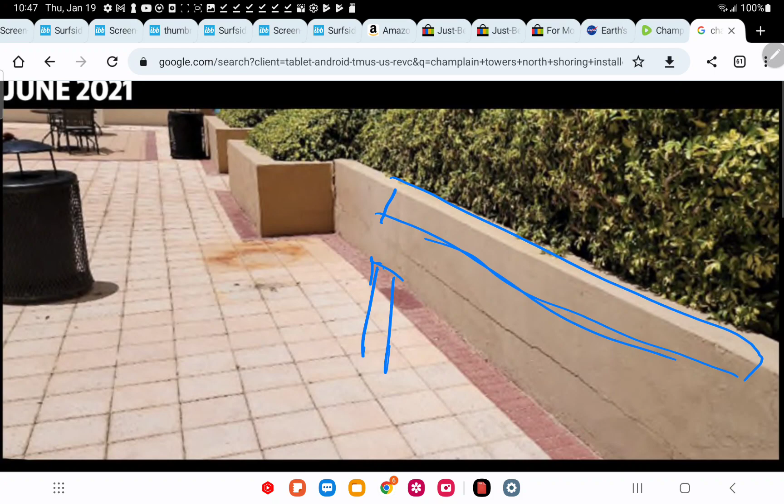Let's move on. So this shows the deck deflection. You have that in your mind. The deck's deflecting. There's a column thereabouts here. It's below the deck, thereabouts right there. So when this deck goes down, you actually see this section on the ground. This bond beam section, this top part on the section laying here. I think it has a little thin layer there, and then it goes something like that. This might be up here. I'm just trying to use my memory.

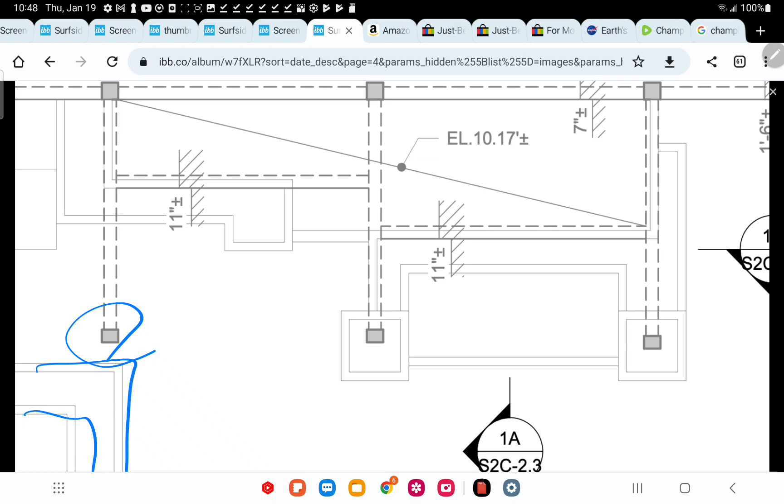Here we have the bond beam that's out of bounds, out of the planter box. It's the planter box there. For your notes. Here's that beam I talk about right here, the bond beam. It goes back there like that, and over here like that. There's the column I mentioned that it was standing over.

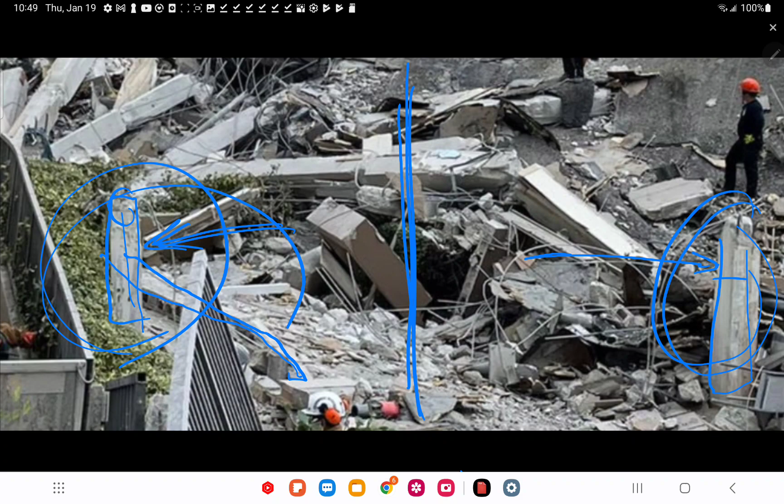While we're here, there's a plant. Okay, that didn't work out like I wanted. Okay, let's go with that. It's actually what I was looking for. So there's that. And so I was wrong. Remember I put it at the bottom? There it was at the top. So like a broken clock, I am right twice a day. All right, so this wasn't one of them. I was right when I said I might be wrong. It might be on the top. Okay, so there's the end of the planter box, and there's the planter box part.

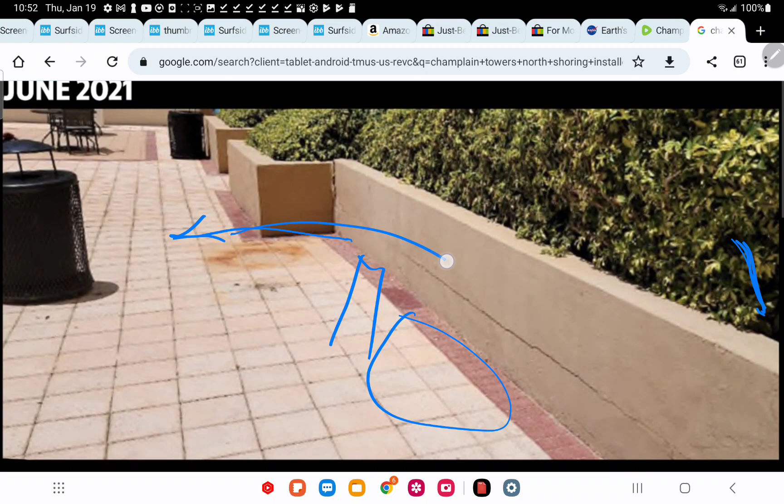So I believe that column's under here. The deck is creeping down. It's doing this. It has that fracture over there by that one column, and all of this is creeping down also. So this is, let's do some exaggeration like that. Okay, and that's that rotation outwards also, because this box is no longer square. To rotate down, considering nothing pushed it laterally.

Like I said, a car backing into the railing, pushing the soil, and then pushing that over. We would see also this would break here, and what are the odds it would push at the bottom of the box and slide it over only at the top? It's possible. You know, as I state, anything is possible.

You can tell me I can shrink down to 1 inch, and I'm not talking about, you know, my size. You can tell me I can shrink my entire body down to 1 inch. You could say I can't do it. I'm like, well, it's possible. You just have to give me the technology to do it. I'll tell you what I need, and you do it, and it's possible. Oh, if you don't have the technology, well, that's not my fault. I just said anything's possible. So if you keep your mind open, anything is possible.

So you have to, you know, think outside the box about what could also do this. Truck, the soil, the pushing, trying to debunk yourself is what I'm driving at. Try to do it.

Okay, so now this is where I believe we're getting at that lifting of the box here, that the columns underneath, as the deck flat goes left and right, this just gives us a larger gap here and a tighter gap here. Let's do an exaggeration. So let's do, well, let me try this. Do an exaggeration. And then, all right, so that didn't work. It's got to be more solid here. Definitely confusing you, right? Let's do this again. So let's see if I can just use this.

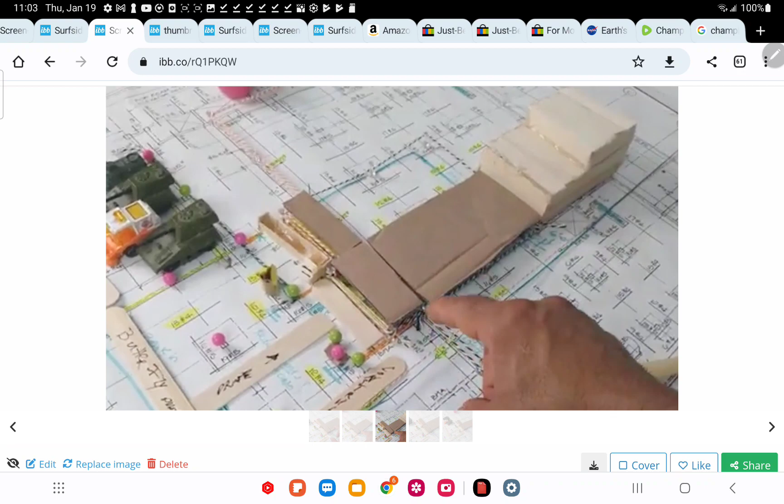And when the building went down, it drove this down flat, including the BMAs. So when that other part of the structure came down...

I base that on this rebar - if you remember, I said about a year ago that this rebar has already shown it has no ability to tug on anything, because it's not engaged enough. There's some engagement there, but not enough. Probably, before you turn up, maybe 7 inches of engagement. Remember, this is those drop slab details, and right about here is the sample that's bad.

And then a deck turns up here because it put that lower planter box there, so it's bad way out to here. So that fracture I described - if they did another core sample besides here, they'd have gone into the planter box, that lower planter box, and did another core sample - I would predict they'd see about the same fracture, no engagement with the rebar.

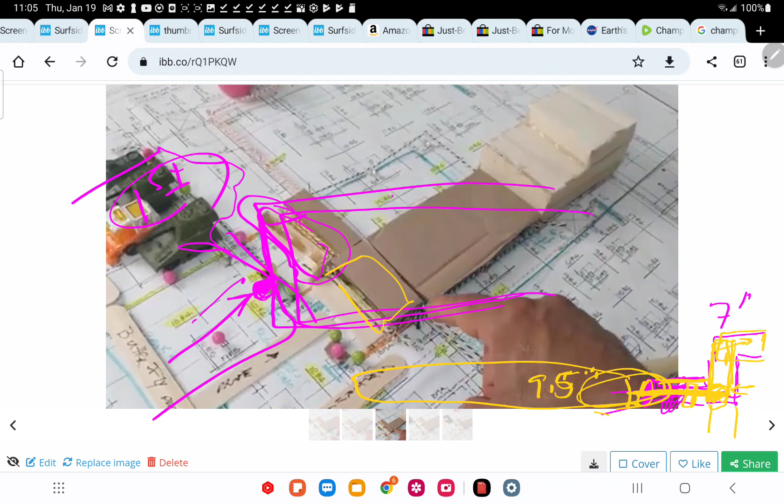So I think I'll end it with this video, this part of the video here.

Remember, our planter box - this is the column that is lifting up in two directions. So this would be, let me say, this is down and this side is up. Remember the drive, that this is not subsided. So I'm going to do up here. I'm going to put the fracture - okay, where am I? Fracture line here, I'm going to put a core sample that's crappy here.

Going back to the diagonal over here somewhere - let's see, planter box? No. So this is the planter box, I believe. So I'm doing a crappy core sample here. Let's see if I can change colors for you. Crappy, planter box, column - that's column in planter box. Fracture. There's a planter box here. All this walkway stays. Core sample with the fracture.

Remember the fracture, as I theorized, like that. So you're getting this failing first. That's why you're able to get that core sample to look that way. I say this is down, D-O-W-N. Let's do that - this is up. So this is up, this would be down over here. A rotation of our box.

So we're going to extend it out a bit. Let's change colors - well, that looks like the wrong color. I got a blue up there already. Let's go with the red. I got some red too. So let's do this - this box is indicating it's rotating down. Oh, look where that puts us - right in our butterfly zone. This is the part that's rotating down.

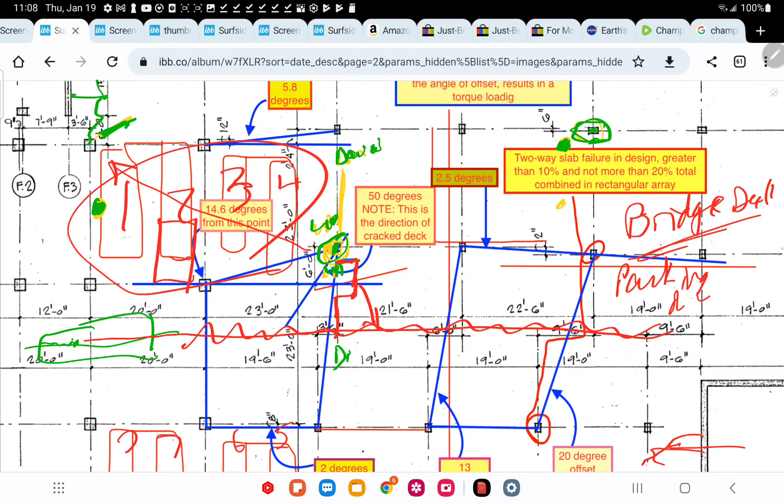The overlay - I did a video on that. That's so critical to extending the life of this deck, even though it wasn't bonded fully. I show that over here - this deck, the bond is capable of a cantilever effect, and as it is over top of each one of these columns over here, out in this part of the deck, it creates its own critical shear zone and then a little bit of tributary zone.

It creates its own - it showed itself here how it can cantilever off the side of a pool deck. That was pretty amazing because it's not on top of this - actually it goes over top, but it's not resting on there. And yet this deck is able to keep itself in an overhang position without fracturing. I talk about how if you then put it over top of all of these columns here - okay, so over top, these are over top.

These are not over top. These are, because there's a column there, they just butted up to. So these are just butted. Okay, so this is my structure now. So this is just butted up to.

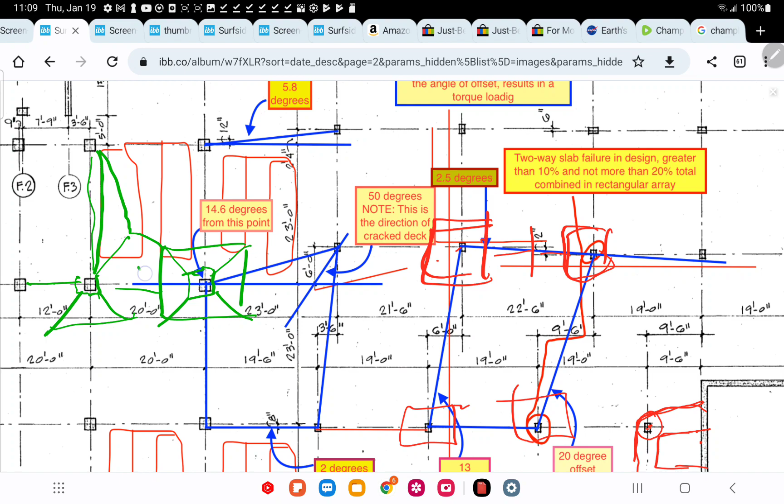So this becomes a dead load. So this becomes, well, this side, because that's an elevated side over here. It's like 1 foot something high. This is dead load. All right, this is all dead load decking here. The extra overlay, all of it. Planter box butts up to the planter box.

All dead load. Okay, over here, it all of a sudden goes over top. Nope, there's a column that goes straight up to the top floor. So again, all dead load. There's a planter box here, so the deck goes up to it. The concrete's a dead load.

All dead load. Back to here now, it becomes over the top, but it has some critical shear zone ability and a cantilever effect out to it to a degree. So this one is butted up. There's a planter box, so it's butted up to.

This is up to. Out here is different behaviors. Here, here, here, here. And there's a construction joint somewhere about here. So if you look at this, you see that this is actually stronger here in all these areas. Again, we're back down to the butterfly in the middle.

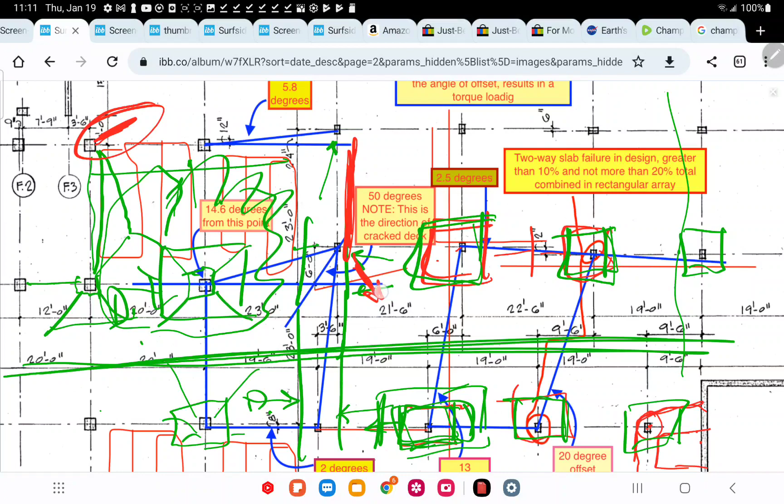But critically so is this fracture right here. Critically so is the identifying of that fracture along that planter box there, the moment of the failure. And it appears to me as the deflection goes away from this planter box, that direction.

Now, if the planter box was 90 degrees, let's say, let me show you the planter box at 90 degrees. So here's the deck. We're going to look at it in this profile like this. And here's the planter box, right? This is 90 degrees. We're looking at the deck here. We're out here in this pool area, pool deck here, right? This is where we're looking. And that's 90 degrees.

Can you get this to rotate the back side of the box to rotate towards this direction here? Can you get that and still get what you observe? Well, why would it fracture the front? I don't have that. We have to get that fracture going in that long direction. I have that column, again, being rigid, transferring up into the... now I'm double dipping on the imagery. I have the column

double dipping now. Let's see. So here it is, solid block above it. And then here's the fracture now. I'm double dipping on the design as I'm doing that.

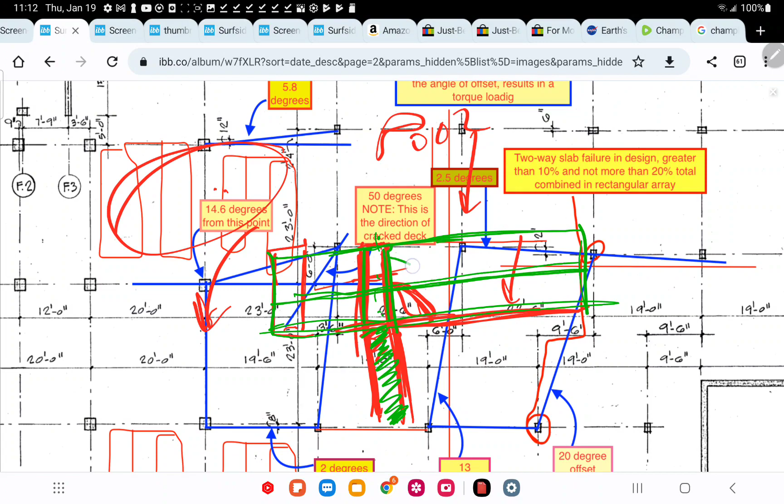And our rotations are down these two directions. And we also have the failure in that direction because of the deck doing what? This offset, this huge offset.

And right about here is where it should be. I mean, literally, they knew where it should be. They literally put the triangulation there, 6 foot in there. So they know, the engineer knew that's where it should be, but then he did this offset.

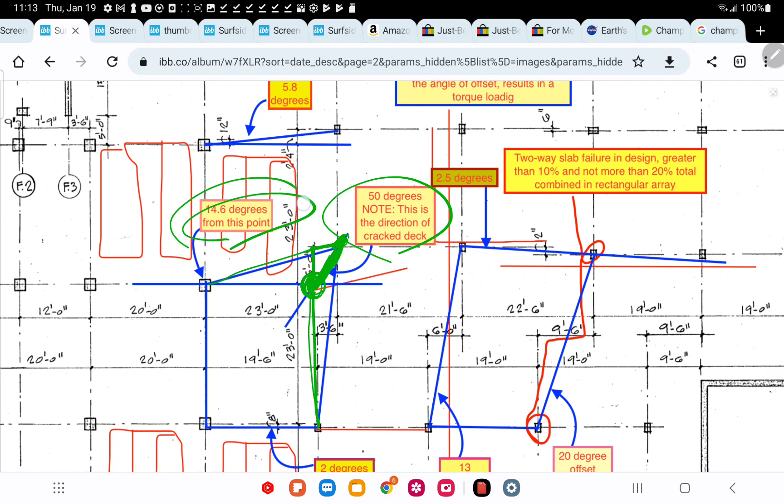And if you take it from here, it's 50 degrees. If you take it from here, it's a different degree. It's 14.6. If you take it from there, it's 50 degrees approximately. However you measure your offsets, either way, they're out of bounds. All right, so that gives us this stressed area here.

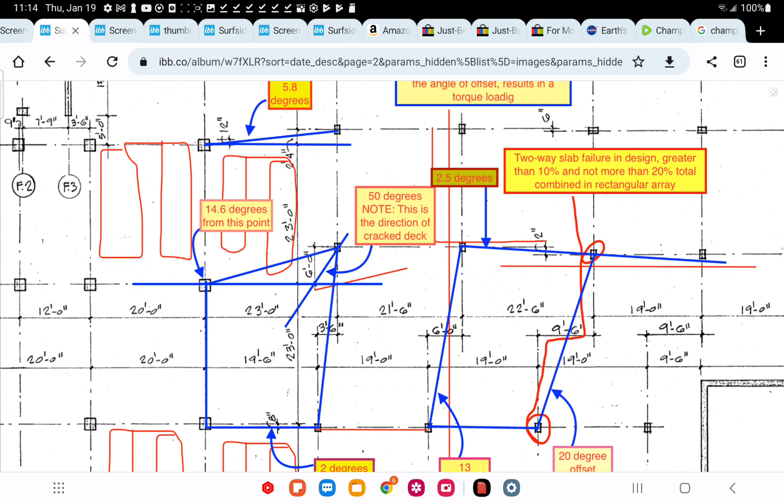That's good. And again, this is the deck collapse first, and then we have the roof with like the shake table idea. The roof being weaker. You have to look at video 10 where I talk about, you can see the PSI, the concrete changes around, at the 7th floor I think, up, and also the rebar reduction goes way down, meaning it's a lot less. Just 4 pieces of rebar on the C columns, the face, just four pieces all the way up to the roof with a reduction in PSI, which means your bond strength during shaking is going to be a lot weaker.